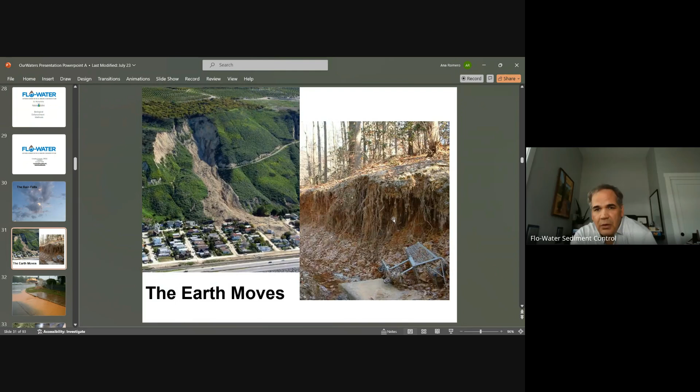The rain falls, the earth moves. There's a lot of steps in between that. And I look at each one of these ports, storm drain inlets, as the ideal spot for nutrients to go in. They're like, hey, I can go underground and go to the water. For trash, for contaminants, for junk, for debris. But I also look at it as the perfect place to control that stuff at the source when you're looking at it from a municipal or industrial point of view. Stop it from getting in that underground infrastructure.

Eliminate the spending happening now on repair, cleanouts, clogging, plus the remediation you have to do downstream, and it gets more expensive the further down you go. And spend the money now so you eliminate the problem and get it to the point where that's not happening and you don't have to spend a lot more coming here. And we have solutions for that. So again, from source to sea, let's take care of the problem.

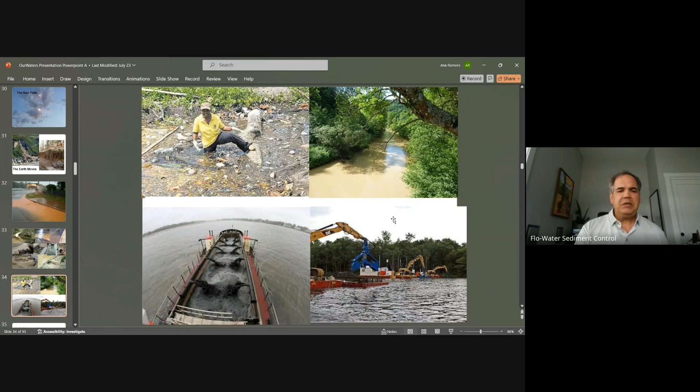A big push on basins has been part of the solution, which is great. But the issue is you have to have maintenance plans in anything where you're going to be filtering water, containing water, accepting water, and so on.

Sorry, I was admitting one more person.

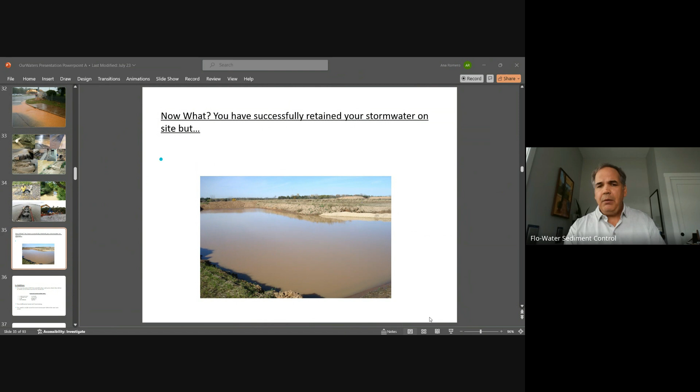And so a lot of those sit there, get overfilled, and it becomes a teacup overflowing, just like on ag fields where you're adding phosphates, nitrates, herbicides, pesticides into the field, and the cup keeps overflowing. But I'm getting off track there. Different sediment takes longer times to settle. So bioswales, rain gardens, etc., do deal with a large chunk of it. But when you're talking the fines, where the nitrates and phosphates are riding and the carbons and hydrocarbons, we need more aggressive solutions. That's where you're getting into the colloidal size. It takes 755 days to resettle each time it gets disturbed. It's just a process.

Sediment and erosion control are both key pieces in water quality. And that's why lately we've been getting projects, and I get these maps of 2 lakes in a huge development and the water report on it where there's alkalinity issues, there's nitrates, phosphates, other contaminants that we need to remediate. And I'm sitting there thinking, I can clean that up, done, but it's all going to come in again. So my mind keeps stepping back and stepping back.

And the experience I have in that soft armor reinforcing industry, where you deal with like Scour Stop or Pyramat or Landlok 300 or some of the turf reinforcement mats that stabilize ground with the root structure, environmentally friendly, biological solutions. That's awesome because you're keeping the soil in place upstream. You're developing vegetation that gets stronger and reinforced, so you have that ability to keep capturing nutrients along that pathway via biofiltration and such.

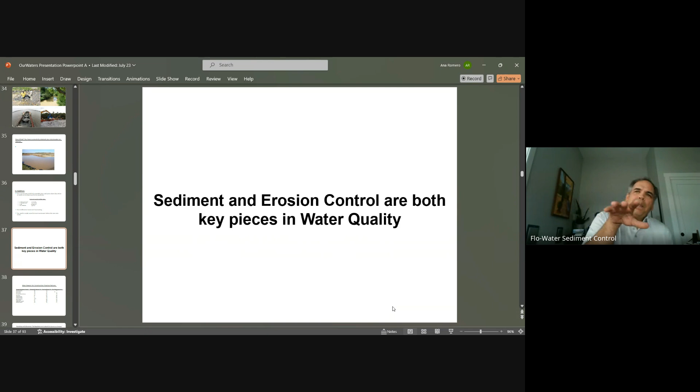The cool thing about that is now let's start at a time, 5 miles out. Let's pick the spots where we can start there and work our way in and control what's coming off the fields and the ditches and everything else, but also what's going in the inlets and stuff that are going to these lakes. Heck, Iowa just got a report that their 10 biggest lakes in central Iowa have capacity issues because they're half filled. Well, they're half filled because everything's coming in from miles out.

So let's remediate, let's deal with that stuff in the lake, which we can do and we will, but let's solve the issue long term so we have sustainable solutions. And that's what's really cool about what we're doing here. We have our waters and we have our soil, and together we're going to be approaching that from soft armor, water quality control, and the nutrient management solutions that are out there and needed.

Sorry, I keep having to add people.

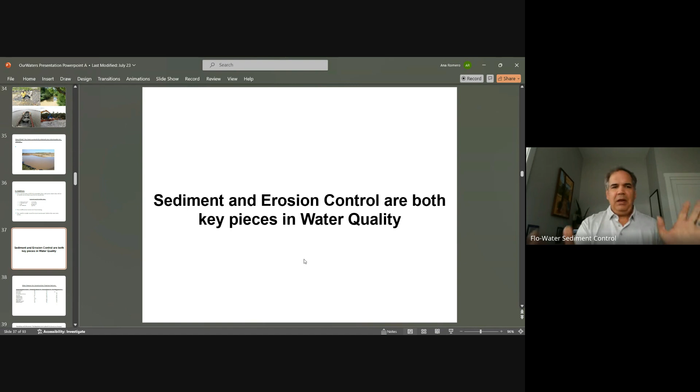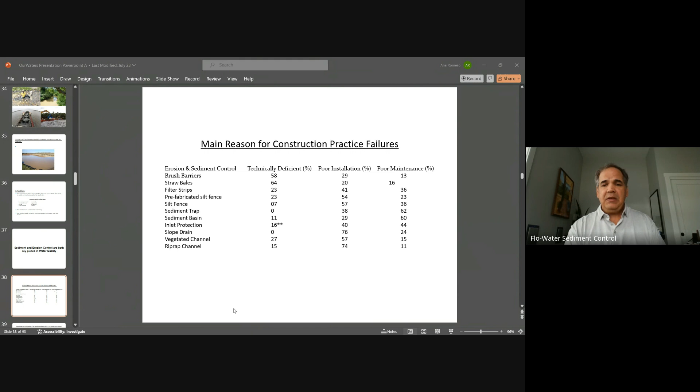The main reasons for construction practice failures have been pretty widespread, but the main premise on those is they're technically deficient. Sediment traps aren't. Sediment basins have a little higher success rate. Silt fence to a point. Inlet protection on the old standards. But innovation has taken it to another level, and I'm going to show you where the best of the best is here when you look at reusability, when you look at cleaning out, when you look at nutrient management, the ability to combine different media to deal with the issues that are in play. And that's where it gets really cool as we explore the options there.

Regulations have changed. Recently, they had another one released talking about the Indian reservations and the oil practices and pipeline and new regulations on more stringent stuff. But everybody's seeing the value of water and how we have to protect it. Soil in the water, sediment. It's dirty. It carries things with it like phosphates, phosphorus, etc. The list goes on. But it's the primary non-point source pollutant and the primary factor in deterioration for the surface water quality. It causes clogged stream channels, increased bank erosion, meandering, and flooding. We get that. What it's doing to our environment and the aquatic habitat is just sickening.

Funding's there. And you get into our solutions, and I'm going to fly through some of these, but our Pump-It Tube dewatering bags are flowing 2.5 times faster than the general big black bags that are out there. We're not grabbing that water and letting it sit there while it slowly seeps out and hope the stuff sits. We're getting 91.6% sediment capture rate. So as that water's releasing and you're grabbing what's in it, it's going to fill 30% on its own. But now you can run manifolds and run 4 or 5 bags at once. Turn one off while the rest keep running. You've eliminated downtime. You're filling those bags 70, 80% now, and you can stack them for shoreline reinforcement or repurposing back into the circularity, depending on the contaminant.

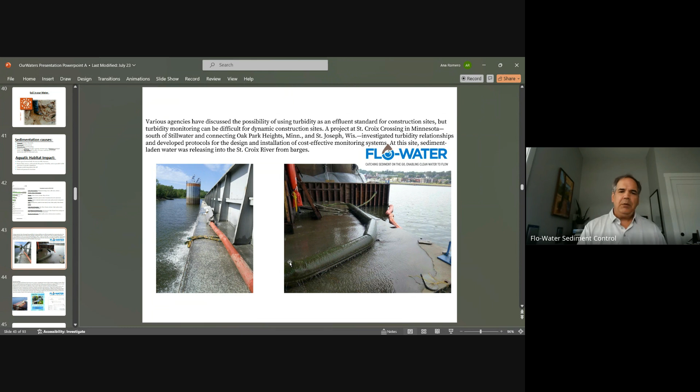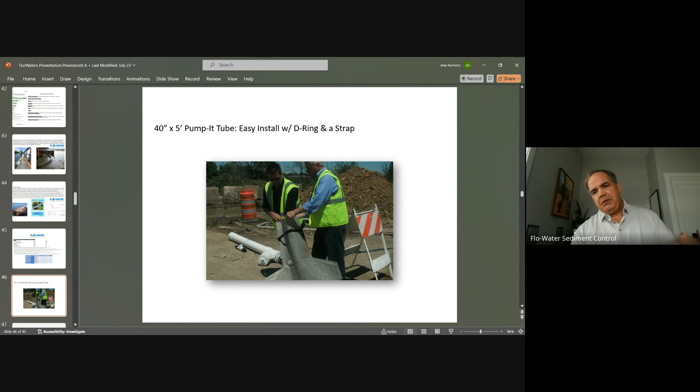We have all the stuff you need. It's approved everywhere I've approached. Hooks with a D-ring and a strap, so it's easier. You don't have to chain it, rope it. Elevate it, you get faster flows. They just work better. I have videos. I don't have time for that, and I'm sorry, but it's all on my website, aplenty.

They've done testing on it at different places. How can it work that way against the standards that have been out there? And the general consensus is if treating the same volume of contaminated discharge water with similar sediment concentrations and characteristics, the woven bags, which are the Pump-It Tubes, are capable of maintaining a higher flow rate for a longer period of use compared to the non-woven.

Our woven fabric has a built-in poly scrim like a hairnet, which gives it the structural stability to take advantage of the high filtering while giving it the structural strength it needs to enable it from performing and not breaking.

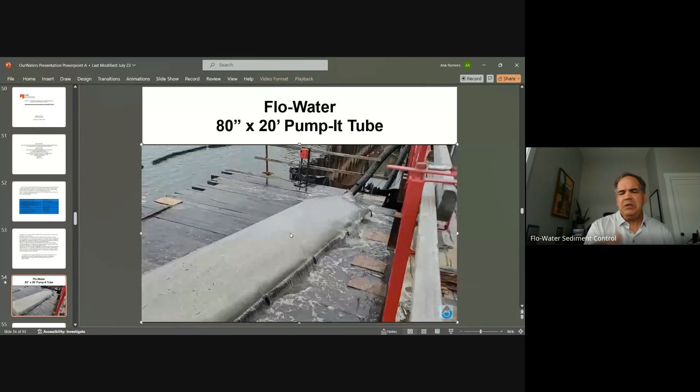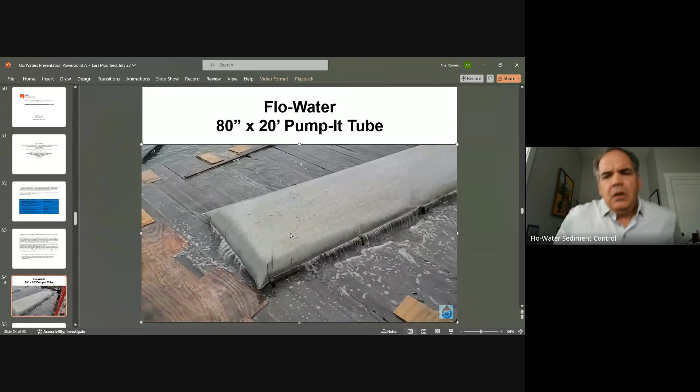This is over on the East Coast on that platform that's designed for the other size bags. That pump's running all the time straight into the bay, and you can see now split it, run 4 or 5 bags, enable that to run without shutting down on the same footprint that they were using 1 bag at a time on. And that's our 80-inch by 20-foot bag running on that pump full, which is good. You saw the video?

Good. The sizes here, 20-inch by 5 foot would handle a 2 or a 3-inch pump instead of 6 foot by 6 foot or 10 foot by 10 foot. Our 20-inch by 10 foot or 20-inch by 20 foot would handle up to a 4-inch pump running full instead of 10 foot by 15 foot.

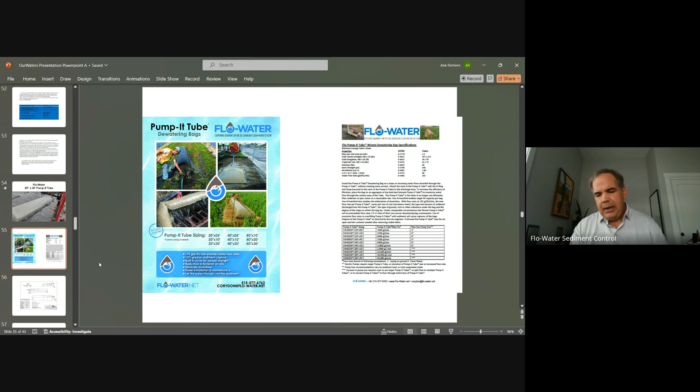Our 40-inch by 10 foot or 20 foot will handle up to 6-inch pumps running full instead of 20 foot by 30 foot. So you can see the difference on site, in warehouse, in transportation. The positives are endless. I've got it showing comparisons. It's all on my website. Any questions on the Pump-It tubes?

You are still there, correct?

Yes. Awesome. Now I'm going to talk about inlet protection. And this is where I get really excited because I just got my 3rd patent approved on what's the best of the best now. And when you look at what's been done over the last 30, 40 years, there's been a lot of really cool progress, but with the same restrictions in place.

If it's sticking above, you're going to have issues, whether it's maintenance not being done and it falling in, whether it's them poking holes in it because it's too difficult. And with the safety standards, we see why. Or designing something really, really performing well, rebuilding that inlet in essence, like on the middle left.

And that Flex Storm Prime or Pure or whatever they're calling it now is really a cool product, but it costs too much and nobody would. So they lessened the product and came out with the Flex Storm Lite, which is the upper left one, which has its limitations, but it's still being sold on that spec. So again, a lot of cool things happening in this industry, whether you look at it one way or another.

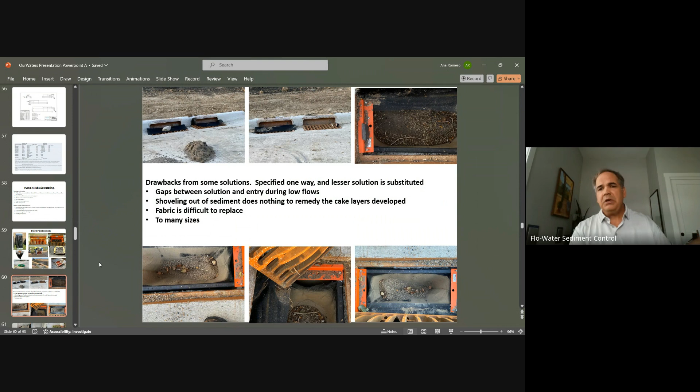This is the one I was discussing that has the gap between the coverage and the inlet, so low flows aren't being taken care of. They're using shovels to clean this out, leaving that cake layer in the bottom so it's a teacup overflowing down and in, and again, down to the underground infrastructure or rivers down below. If you leave it in and don't take it out, because contractors aren't paid for removal, so they're not going to go do it voluntarily, it becomes flooding issues.

That brings me to two changes that I think need to happen in the engineering industry. Anything with filtration on it has to have maintenance built in the spec, and when to do maintenance, not performance level to meet. Okay, if you have maintenance and you have to do it when it's 30% full, that cheap stuff that's a Band-Aid is going to have to be replaced every rain event. It's not going to work.

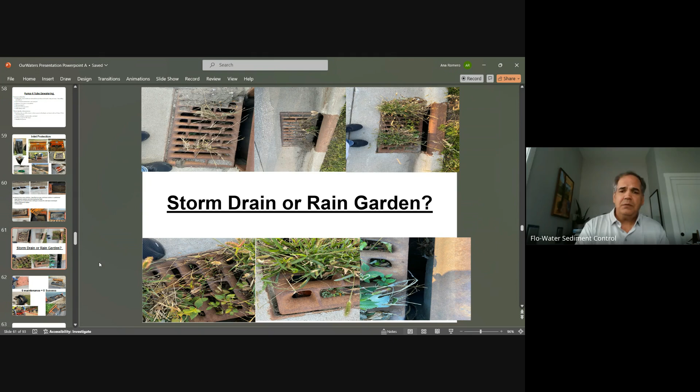That stuff that's meant to be there long-term will sustain. And that's a non-proprietary way of solving all those issues. Maintenance, maintenance, maintenance. If you don't do maintenance, you're going to have issues.

Our open throat curb, where there's no metal, just a space, we have metal S-clips on the sides and in the middle if they're longer. And they have negative friction in, and the fabric replaces after 18, 20 cleanouts. You can backwash it for more, you know. That's cool. And they can butt up end to end to handle larger openings, so you do have easier maintenance on it.

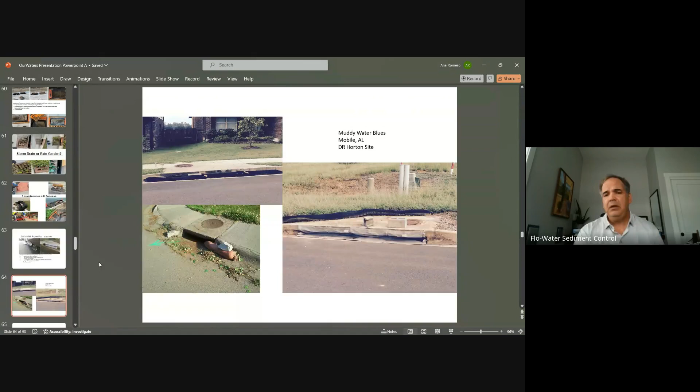Muddy Water Blues, D.R. Horton site in Alabama. What they had there had its issues, and it's pretty visual as to what they were. And then they had ours on the side, on the bottom right, which was recessed in, not taking up footprint. Pretty neat.

Then we have our undergrade EZ-Catch that adjusts both ways. So in most areas, two sizes will handle 90% of your storm grates that are square or rectangle. The bags Velcro off, so after 10 to 12 cleanouts if you're kicking it free, 18 if you're backwashing it, or so. Completely recessed under the grate. That curb is a magnet on top and tucks in. To me, that's the greatest thing.

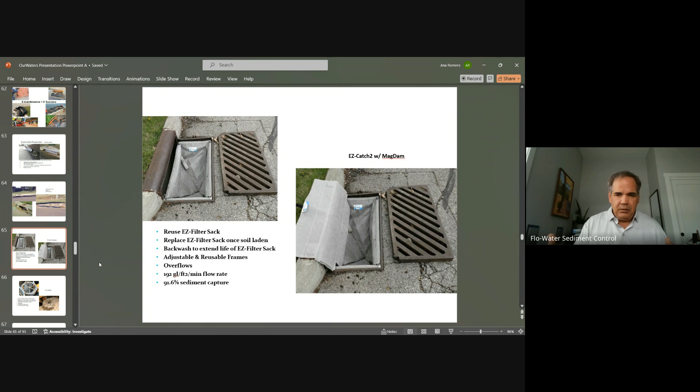But when you have people going out there and shoving shovels down and everything else, and the frame's not meant to rebuild it, it's meant to be stabilized by the grate. So we came out with something more durable I'm going to show you. Our EZ-Catch Man's perfect for round and manholes, beehive, etc. They adjust. The two sizes handle from 15-inch to 37-inch in diameter. Overflows in the corners on the other one and between the tines here.

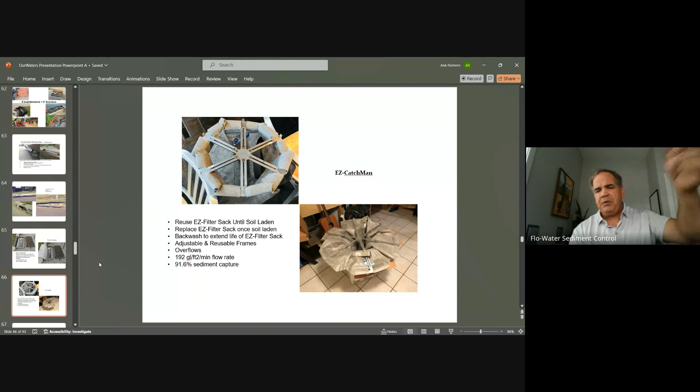So you get that faster flow rate, higher sediment capture, ease of maintenance, reinforced seatbelt straps in all of them to pull up with J-hooks so you lessen the strain. They're patented. We have specs on it. Makes it easy to tell people what you want on your sites. Questions on those two?

Well, and now when you look at it, and we have him coming up in two speakers, but like Aquaflex's carbon capture technology, you drop in those bags and you just made them carbon capture with repeatable, replaceable units in that. Our magnet on top, which I'm getting to, we have that now, a version built in where it's grabbing the nutrients when it comes through as well. So some cool advancements on that.

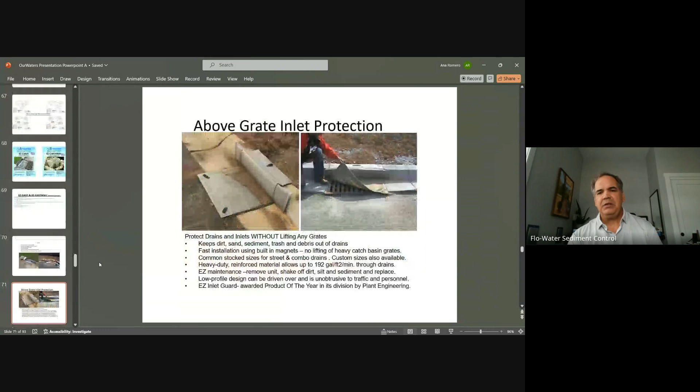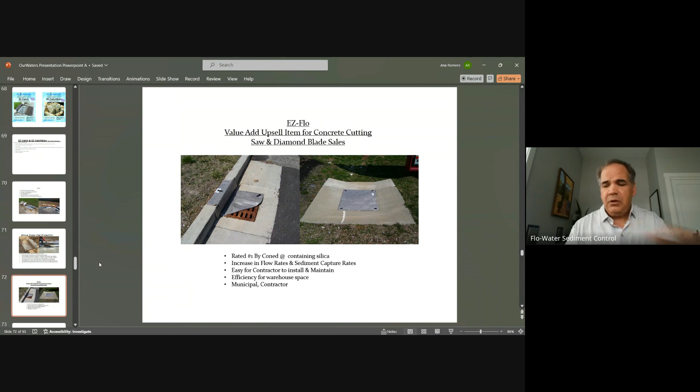Speaking of that, our EZ-Flo is our magnet on top. You don't have to tie it down. You don't have to move the grate. It hits a lot of safety concerns. Rated #1 by Con Ed in New York at keeping the silica out when they're cutting concrete, which is a federal requirement. So put it down, clean up, clean it out, next side down, boom. Cities will use it for 9 months a year before they have to replace it as they're cutting concrete.

This facility here had 35 of these inlets. Took us an hour to do them, less than an hour. All the other solutions, you'd be talking a day and a half or so. The labor savings is insane. Not to mention how much room in the warehouse you're creating by taking up less room in that spot. Flat, curb, overflow, curb with overflow.

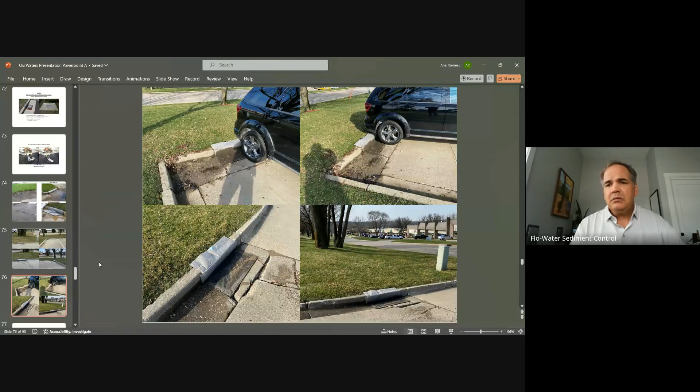Urbandale, Iowa. 3 big rain events, 11 days. That's what we kept from going down and in. Better curb appeal, patented.

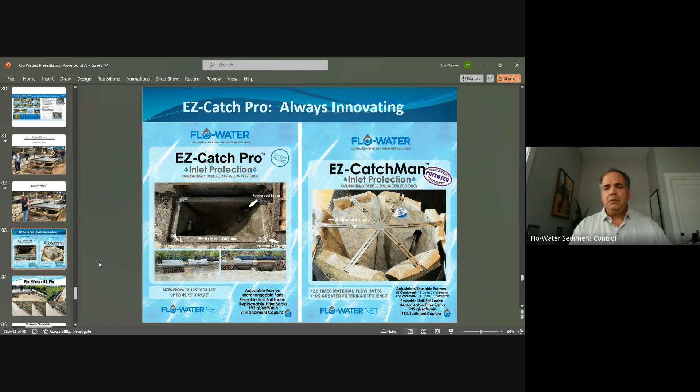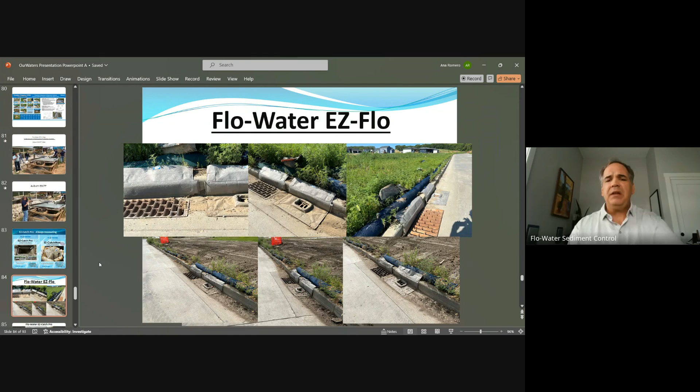This is West Des Moines, Iowa, on one of their busier street corners. Day after they took the concrete washout unit out and we're washing them all off, that's the silica we captured, putting it in, and then they did that in the upper pictures. Pretty neat.

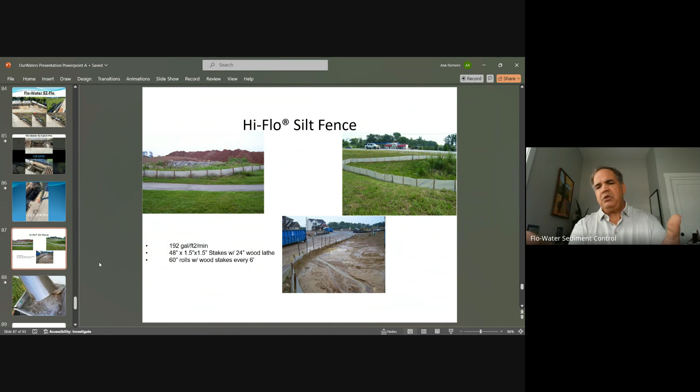Combining materials here, and you've seen us do that in a few spots, and we're going to get real creative in the next presentations, but our concrete washout system where you're having a pH stabilizer or pumping in CO2 if you get large enough. You have a flocculant, chitosan, along with a bridger flocculant, which is a chitosan poly mix. And you're able to filter that concrete slurry on site instantly, water treated, and just be left with the hard residue instead of letting it sit there and do what it does.

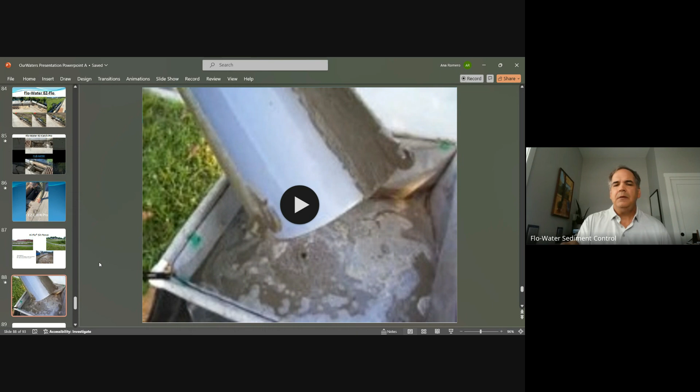And we've seen it. Large project up north, Big Lakes, Island project, 30-yard dumpster, double wrapped with our fabric, pumping in CO2 to deal with the pH level, pumping in the flocculants as it's going, and they could dump it all in, filter it on site in the false bottom dumpster, you get what I mean? And then that hard residue they have left over, they're able to put in for helping to rebuild the coral reef underneath. So there's some cool applications being had, and that's where this starts.

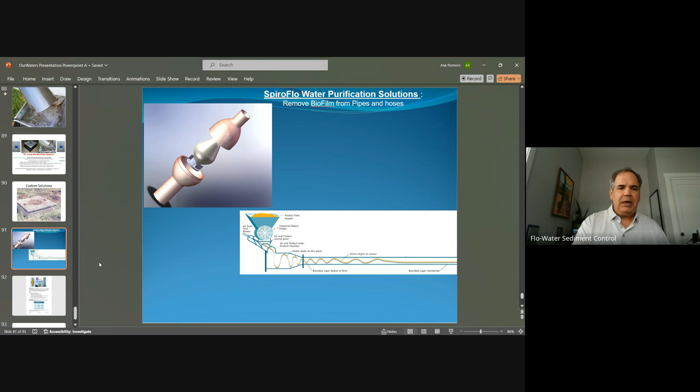Other really incredible technologies we have started promoting just because they make sense is like SpiroFlo. Whether it's grain running or whether it's water in municipal facilities, waterworks, any pipe this is put into, it creates a tornado effect, as you see in the drawing below, where it eliminates that slime layer on the piping, tubing, etc., so you don't have the repair and maintenance as much. The water consumption is reduced drastically. Just a lot of really cool positives that we're getting into more and more with that. Again, go to our website on this.

Before I hand it off next to Jamie on the Reimar stuff, I'm just going to touch base on BioStar, because George is on the other side of the country now doing some work, which is great. But this is a flocculant made out of crab shells, shrimp shells, exoskeletons of sea life. It's put through a deacetylation process. So it becomes water soluble, or they can make a flake formula that you can meter release. But it turns back to water and CO2 when it's done.

So quickly it takes those dirts and flocks them together so they can be filtered. And then there's no residue left over like some of the other flocculants can leave. And again, everything has their place and we represent them both. But that's where this got started in the mining industries and other things, lake projects, stormwater applications. I've been working with them for 20 years.

But their next evolution, which to me is really cool, is their dust control. They've developed a 3-level system on dust control, which has no chlorides in it. You've just eliminated one of the biggest contributors to an environmental issue when you're talking water and even soil when you're saying chloride. So that's pretty huge. And again, we have a tote available, dry formula, meter inject, and on the dust control, it comes in liquid totes if you want it pre-mixed, or you can get it in the dry bags and mix it, which is a lot more friendly freight-wise.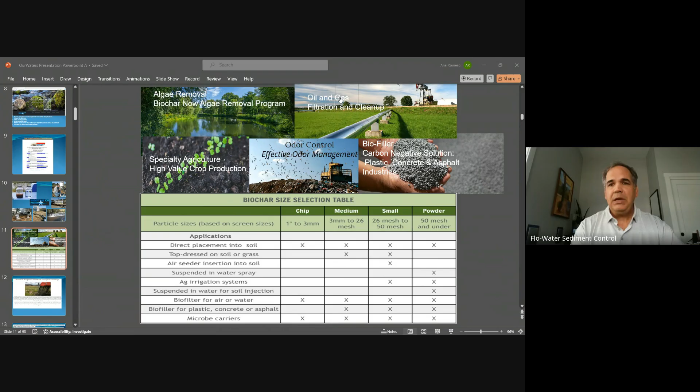But I'm teasing you. My 30 minutes is up, so I am going to take questions. Does anybody have any questions for me now? Scott, Steve, Jamie, Jeff, Rome, Abigail, Itunoa. Questions?

I don't have a specific question, just a comment that this is the kind of collaboration that's necessary with all of the problems going on with water. And it's great to see a whole suite of technologies joining forces, which is few and far between until what you've put together, Corey. So thank you.

Well, I appreciate that. And I was having a really cool discussion yesterday with someone that I respect and everyone would respect if I had the freedom to tell you who it was. But the eye-opening they had was, well, not only are you having a suite of solutions where you can solve the problems, but when a city, a contractor, an engineer, a municipality, a governing authority comes in, they're not just seeing one solution tied to one manufacturing facility. They're seeing a suite of options themselves so they can make the right choice.

And so if we have someone bring us a soil contamination, like downtown Des Moines, they have a 4-acre property that's 8 foot deep, contaminated soils, 3.7 million plus to take it to the landfill, hazmat fees, remove 8 feet of dirt, bring 8 feet of good dirt in, boom. Carbon footprint, insane. We get it. Landfill's already full. Where are they going to put it?

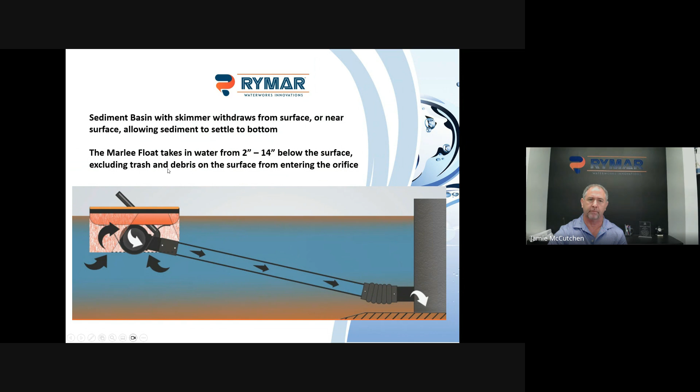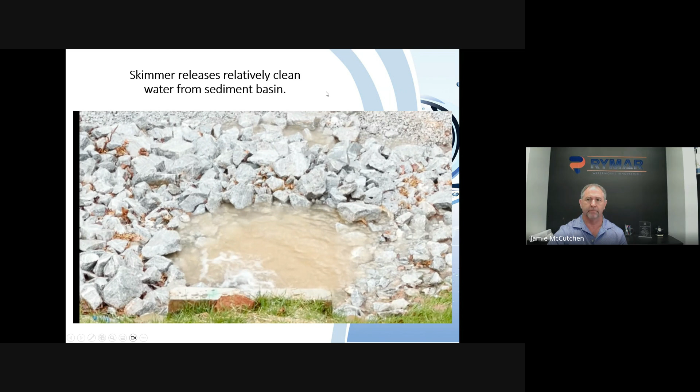So if anyone's not familiar, skimmers are typically used in sediment basins. They meet a surface withdrawal requirement. So they drain the basin from the top down, allow more time for mud to settle and release the cleaner water from the surface. This is a quick video of one of our skimmers on a project that's directly adjoining the lake and a pretty nasty sediment basin. They actually had a big blowout on the side, but that's the actual outlet. Compare the water that's in the basin to what's being released, and this is draining directly to Lake Hartwell, probably less than 100 yards away. This shows how effective they can be, a simple product, but very effective in releasing the cleaner water.

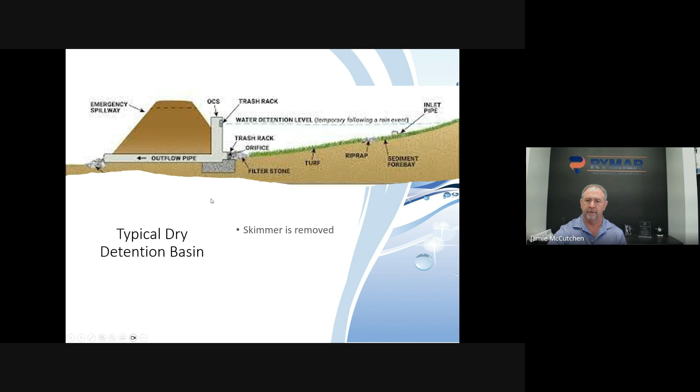People generally think of skimmers as during-construction products, and they remove them post-construction. So in a typical dry detention basin, once construction is completed, they remove the skimmer. They put some sort of a low flow outlet near the bottom of the pond and size it to release a first flush. First flush methodology is generally intended to allow for pollutants to settle, but we're settling everything to the bottom of the pond, and then we're pulling the discharge from the bottom of the pond. And they typically have some sort of outlet structure, filter or guard to try to minimize clogging. But these need a lot of maintenance, and there are some fallacies in this design.

So we've been pushing to use skimmers in the basins. Again, basins rely upon the natural settling of sediment particles. They travel from the inlet to the outlet, so over that flow path, you're going to see the sediment particles generally make their way to the bottom. And so skimmers release that cleaner water from the surface, and they've been widely accepted for construction, proven to be a very cost-effective item to do that.

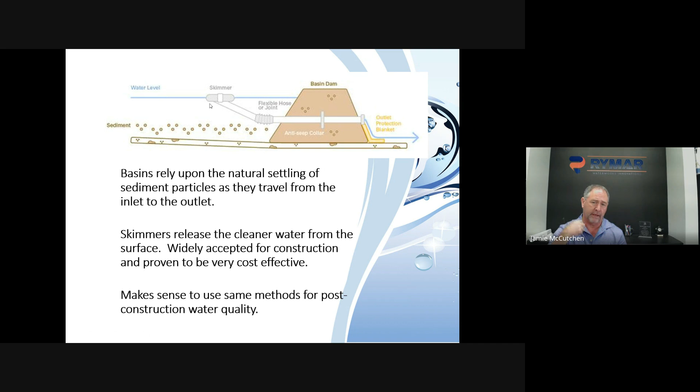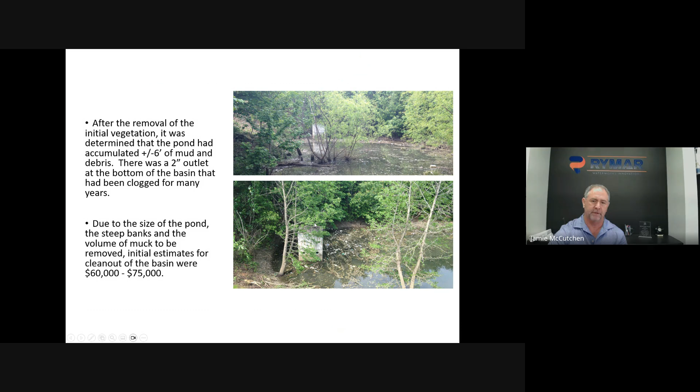Once the vegetation was removed and kind of timber harvested out of it, we realized there were 6 feet of mud built up because there was a 2-inch outlet at the bottom of this basin that had clogged many, many years ago. And it just continually built up debris and muck over probably 15 or 20 years. The estimate to clean out this pond was probably $60,000 to $75,000. Be a lot more than that today.

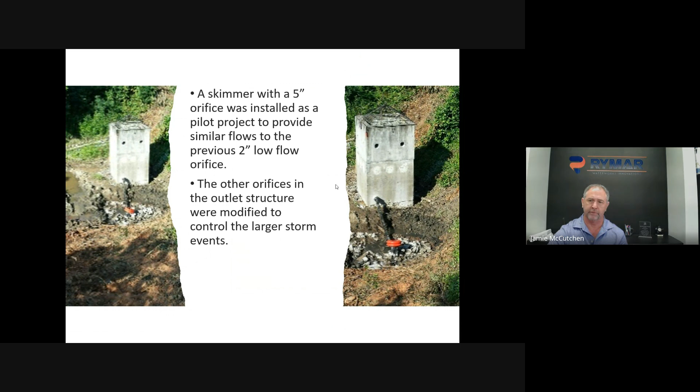So we ended up redesigning the pond. We put in a skimmer as the primary low flow orifice, and then changed the orifice configuration in the pond. The advantage here is we had a 5-inch skimmer, so it was much less prone to clog than a 2-inch low flow orifice, but it had a similar flow control. And we monitored that pond because this was a pilot project in this county. They required us to do monthly monitoring reports to make sure it was working correctly, which it did. It worked very well.

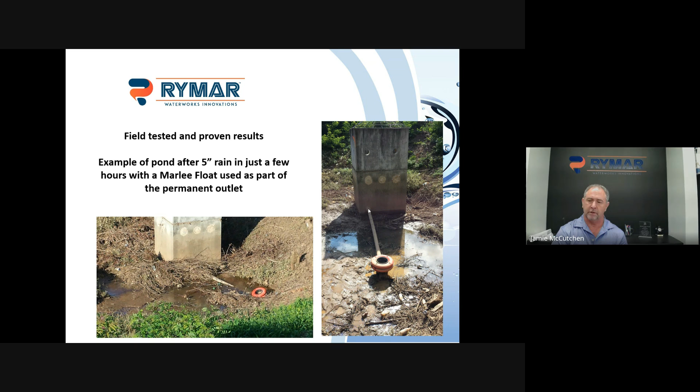It's kind of hard to tell from this picture, but that riser structure is about 12 feet tall. And so if you had a 2-inch outlet down here at the bottom and that had clogged, it would have been an extremely difficult, probably dangerous situation to try to unclog it. So we've been pushing skimmers. Really, we came out with this one in 2013. We've been recommending them for permanent use, mainly for maintenance. These detention ponds often aren't maintained well, and those low flow outlets get clogged. And so if you can do anything to help minimize the maintenance, that's definitely a good thing.

But just now we have developed our water quality filter. And so this is that same pond. We've kind of used it as our sandbox or playground for the last 10 years. And we came up with an idea to say, hey, what if we use the skimmer to pull water through some sort of a filter and provide even more treatment before that water gets discharged?

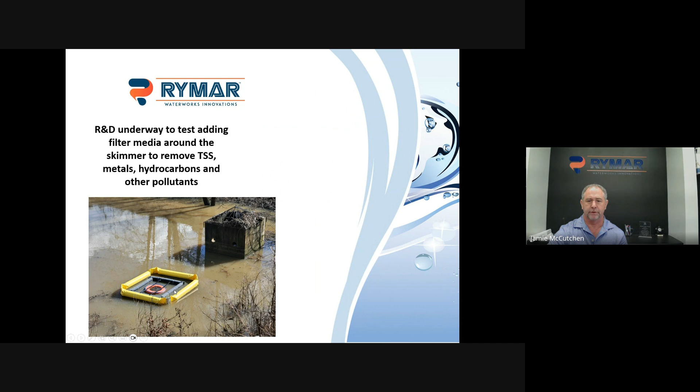What we came up with was a 2-stage system. So the outer stage, and this was our prototype, was essentially a turbidity curtain, but it had a filter material built into it so flow could go through it. And then the inner was a non-woven material that's designed to absorb hydrocarbons, definitely helps with TSS, and can also potentially help with metals. We monitored this thing for about 2 years.

And you can kind of see the turbidity here in this left picture. The water in the main basin is darker, more turbid than the water as it gets to the skimmer. If you look at the outlet structure, I wouldn't drink it, but it's fairly clean water for coming out of a detention pond. So we felt like it was doing a pretty good job and meeting what we were trying to accomplish. So we had TRI Environmental do testing on it.

It was done to an ASTM standard and determined that we met over 90% TSS removal. So in most places, water quality standards are either 80% or 85% TSS. That is a pretty typical standard. So we have confirmed our skimmer filter combination meets that, actually exceeds it at over 90%.

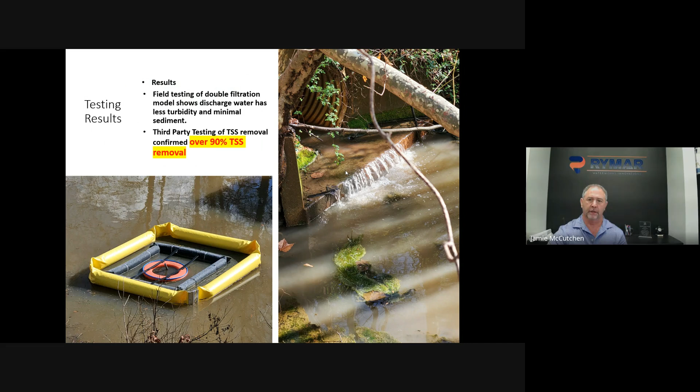One thing to point out about our testing was we set the test tank up so that it did not have a forebay, had very little travel distance. We're actually putting the sediment-laden soil into the tank within about 1.5 feet of the filter. So we took out travel distance, took out forebay, and just said, hey, we want to see kind of a worst case condition for just the filter itself. Still got over 90%.

Jamie, quick question for you, and I may be getting ahead of myself, but when I look at that, and I've always seen post-construction, whether it be large scale at the casinos with their big ponds and fountains and everything else, or in developments that have lakes and stuff.

Do you see this at the forefront, having a rising filter and those controlled things where the water can be released and used for irrigation and other purposes from that point? Yeah, I think we've got a ton of potential. Obviously from the stormwater standpoint, what's regulated, what's required, is kind of where the market starts to meet. And so we feel like the cleaner water you can get, the more you can trap in the basin, which is kind of the main purpose of the basin, to trap those pollutants there so they can be managed and handled. But yeah, you're releasing that water. It can be used for irrigation.

We had some discussions with Clemson University. They've got a program for developing countries. Like, hey, if you're pulling water out of a river, could you use some sort of filtration material like this to get cleaner water? It's definitely not going to meet U.S. drinking standards, but it can be a lot cleaner than what they have now.

Well, that's what's on our minds, at least my mind, and in our discussions. I don't want to let too much out of the bag, but the media we have, Scott's materials, my materials, combining these, I think these units will be able to be tailored to taking out what's needed so that water is the most usable again. And that's one of the huge points of what our waters and our soils is.

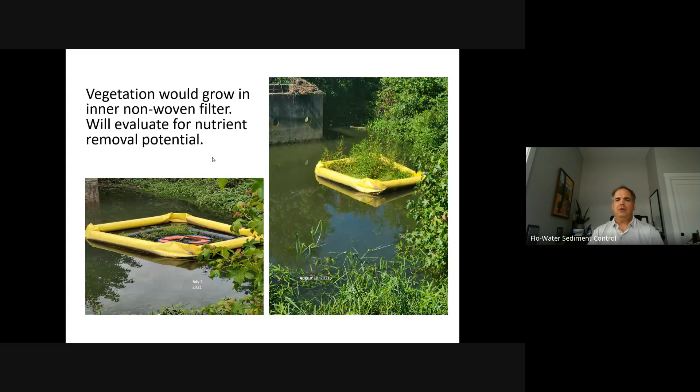Yeah, when we came up with this two-stage system, the idea was that we would be able to incorporate specialty media into the system very easily. Now, some of that media requires contact time to have more efficiency. The non-woven material we use is actually treated with an antimicrobial. So areas that are having bacteria issues or fecal issues, it will help some. Full disclosure, we have not done testing on that yet to see how much it helps, because it does require contact time.

But that interior filter is actually 2 layers, and it's slitted and the panels are offset. So basically it creates a weaving motion through the filter to create that contact time. It's still fairly quick. I don't know if it's going to be super effective, but any little thing we can do that can incorporate media that will tackle more than just sediment, we feel like that's going to be a benefit. We're not saying it's a one size fits all.

There's certainly partnering with other our waters groups and materials to go in there. That'll be kind of where hopefully this organization goes, to see how we put different products together. One interesting thing when it comes to nutrients, we had a time-lapse camera set up on this pond, and in the summer we actually started growing vegetation. So the non-woven material, over the summer, started sprouting.

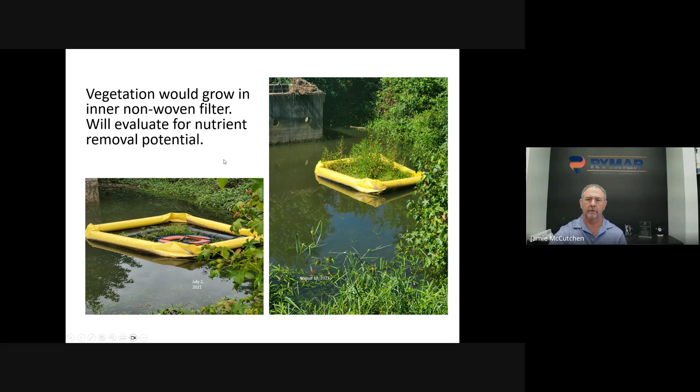We have now kind of finished our initial prototyping, finished our testing, and come up with a commercial version that's just now becoming available. We continue to monitor it. This is kind of a little bit better picture of this pond. One thing to point out is this pond is in a heavily commercial developed area, but most of the development does not have any other stormwater management. So it's maybe a 40-acre watershed or so that comes to this pond.

It's located on a former car dealership, so it's basically got asphalt all the way around it. And upstream is a grocery store, shopping center. There's an electrical substation there. There's several other retail developments. But you can see, and this is fall, so you've got a lot of leaf litter and other debris in there. But this pond gets a lot of muck, just a lot of stuff in it.

And so as we continue to monitor this and show that it works, it is a dry pond, so it'll drain down pretty much entirely, and then the next rainfall fills it back up. And so one of the benefits of our filter compared to traditional methods of water quality: when you get a small rain event or a slow rain event, and basically water's coming in and going out just about as fast, that water's still having to go through the filter to get to the skimmer to get discharged.

So you're treating those really small rain events. And then what we recommend, depending on the size of the site and size of the area, if you can size the skimmer to control that low storm event, in most cases that's like a 2-year storm, then you're now treating up to whatever event you can control with the skimmer.

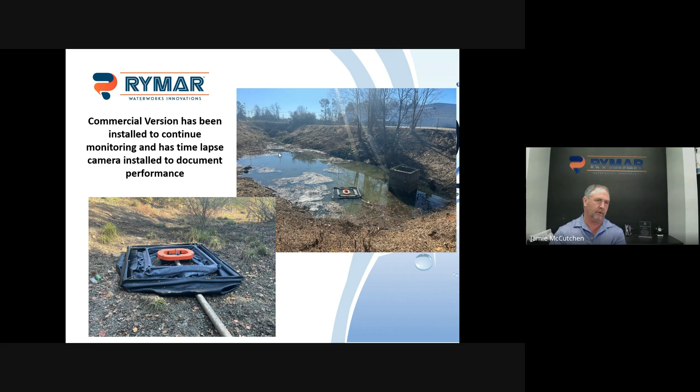So if you can size the skimmer to be your 2-year outlet control, you're now treating everything from the trickle all the way up to that 2-year storm, which is you're getting much more of that annual rainfall, and you're treating it to something that's been tested to show at least 90% TSS. And again, that was not counting a forebay, not counting travel distance, not counting any vegetation in the pond. That's also going to help. So we feel like you're going to easily achieve that 90% level in most cases.

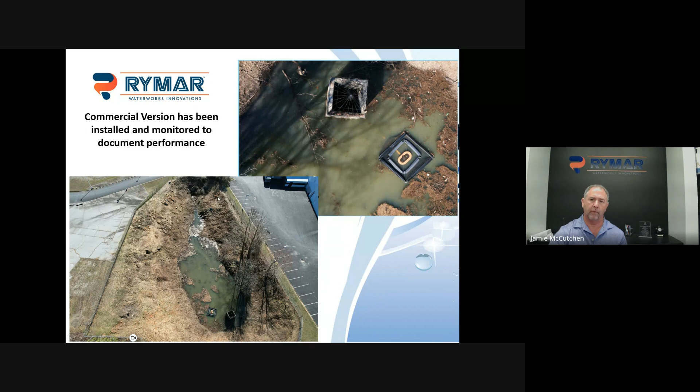Again, this is a little better picture of the pond. It's kind of a top-down view. You can see the skimmer in there with the filter, draining into there. And then this is just a bigger view of the pond. Again, asphalt's all the way around it. So the idea here is that the skimmer floats, you get a high filtration rate coming through the 2-stage system.

The filter is about 3 feet deep in the pond. So if the skimmer rises up more than 3 feet, it's open on the bottom, and so water can come underneath. At that point, we're allowing gravity to basically do the pollutant control because it's a very low flow rate coming below the skimmer up to it. And so it's not enough force there to pull those sediment particles or pollutant particles up to the skimmer to get discharged. So it's kind of a hybrid of filtration and gravity system that allows it to have a very long life, very good flow rates.

And again, you kind of see the 2-stage system here. We've got that outer, just a polyethylene, typical woven geotextile fabric. Corey, we're definitely going to look into using your fabric in there, because I think it would be an even better application for it. And then this interior is that non-woven material.

So just quickly, some of the benefits that we talked about is your peak rate of discharge for your pond can be based on your filter treatment flow rate up to that first quantity storm event. In most cases, you're basing that on that first flush release. So you actually release that first flush faster, which actually makes your pond smaller. So from a developer standpoint, if we can make that pond smaller, it's going to give them more square footage to develop, kind of better yield from the property. So it makes them more willing to add this type of material.

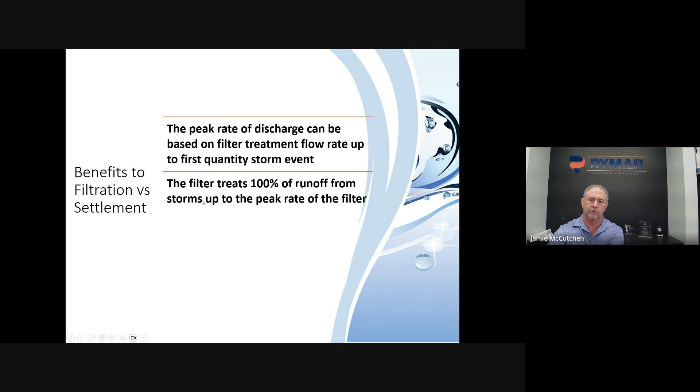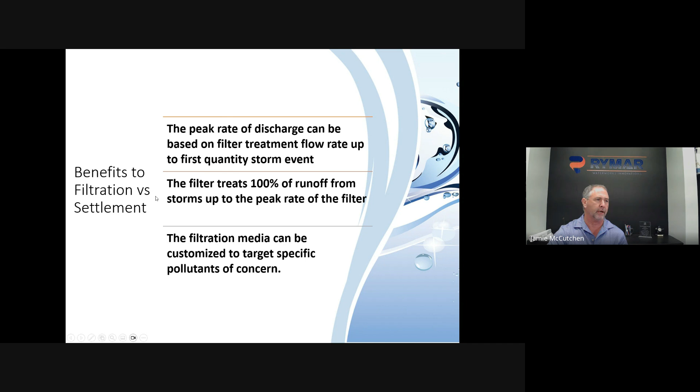Again, the filter is going to treat 100% of the runoff from storms up to the peak rate. And like we talked about, we can customize that filtration media. I think this is really where the Our Waters organization comes in and starts partnering and says, hey, we've got a material that can meet whatever pollutant of concern. We can incorporate that into our system and then come up with a system that attacks the specific concerns for sites and general areas that have different concerns.

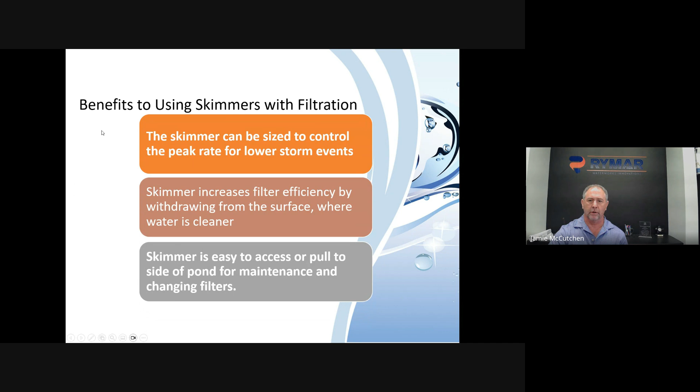There's obviously some benefits to using the filter with a skimmer. Again, the skimmer can control that peak flow rate. The skimmer is going to increase that filter efficiency because you're withdrawing from the surface where your water is cleaner, so you're not having to treat as dirty a water as it is on the bottom. And then the skimmer makes it easier to access. We're putting these filters in the pond, so there's a huge volume of pollutants it can retain, and you can get to it pretty easily to clean it and change it. And currently we're recommending every 2 years to change our filter.

It's not a perfect solution. It's not one size fits all for everything. Filters are prone to clog over time, and so you're going to have to do maintenance. Corey, you talked about it earlier, different areas enforce maintenance requirements differently, obviously, right? Some areas are really proactive and do a great job, require annual inspections and annual reporting and make sure they're done. Others, ponds may not be seen for 5 or 10 years, and that's just the reality of where this industry is right now, depending on the MS4 you're in. But if you're going to consider this, it's going to have to be maintained.

The other thing is the skimmer has to be durable. A lot of the skimmers out there are made of PVC. We wouldn't recommend a PVC product. Ours is an HDPE product. It's a 20-year plus lifespan. And the biggest challenge for us, and this is where organizations like Our Waters and others can kind of help lead the charge: there are no established standards for basis of design.

So one of our biggest hurdles right now is the engineer wants to use this. The local MS4 is like, well, I've never heard of that. Nobody's ever done that before. And so they don't have a method in their design manual that says, okay, here's what you have to do to get approved. A lot of times you can overcome that in a variety of ways, just an engineer explaining what they're doing, or we're trying to get the word out to MS4s. But it's definitely one of our challenges right now, people that want to use it having to make sure that the local authority will approve it.

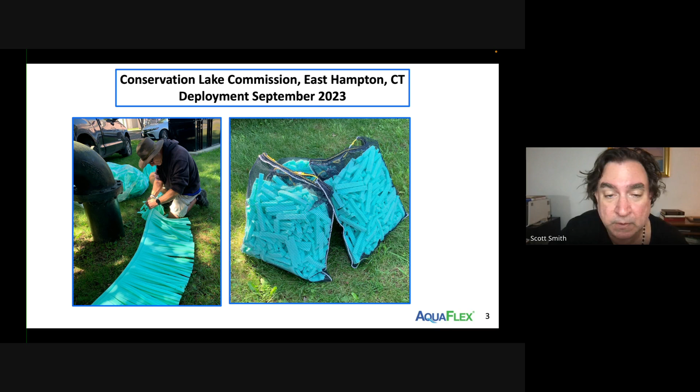And I've actually trademarked sustainability without compromise. What that means is low carbon footprint, minimal impact on the environment, and maximizing protection of health and clean water. So the point is, this is a low foam density. You're not using much carbon, and it's reusable. You can wring it out, and you can clip.

And we'll get to more in a bit about how it's not just for remediation. You can actually clip things off. It's part of my patent, and you can tell what you're absorbing over time. And you can see this installation here from last September. You can clip little segments off of the blades of the open cell foam eelgrass, and you can track what it's absorbing and pulling out of the water over time. Clip one blade off every day for 7 days, if you understand what I mean.

And you can see here it absorbing a variety of contaminants out of the water, and we have been able to pull the excess nutrients, especially particulate phosphorus, out. And I've got some short embedded videos. Here's a video of this install.

One question I have, Scott, is that's instant. The moment that hits it, it's captured. It doesn't have to sit there and cool, correct? Yeah, I mean, and it's over time too.

Can you hear this video too? Can everyone see the video? Yes, I can. But it's the background. I'm not hearing properly.

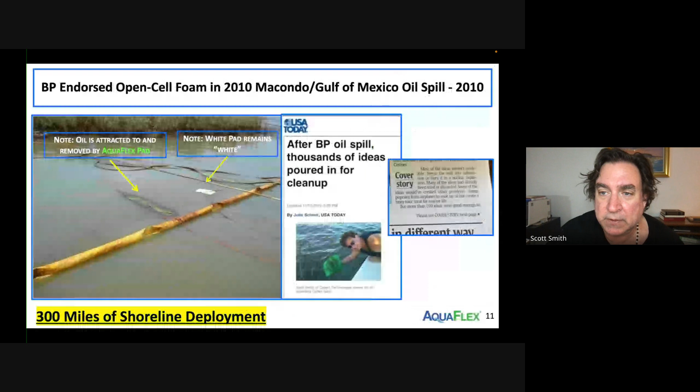And I have a saying that when your technology works really well and better than everything else out there, it's disruptive. And as entrepreneurs, you think everybody wants to buy it. And then you get threats and the big companies saying, well, we don't want to use your technology, Scott. We don't want to get the oil out of the water. We'll lose 80% of our revenue. We're associated with the landfills, the more trips we make to the landfills. But I think we now live in a world 10 years later where the old legacy technologies and business models preventing technologies like these from gaining traction, those days are over.

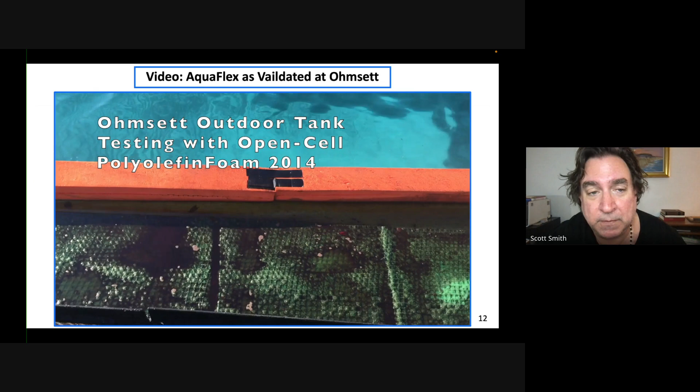And then I validated it in a real world oil spill first, and then the United States Bureau of Safety and Environmental Enforcement has an OHMSETT facility. Some of you may be familiar with it. And here you can see our material with wringing out and recovering it. So in many applications, you want to talk about sustainability without compromise. This is so effective.

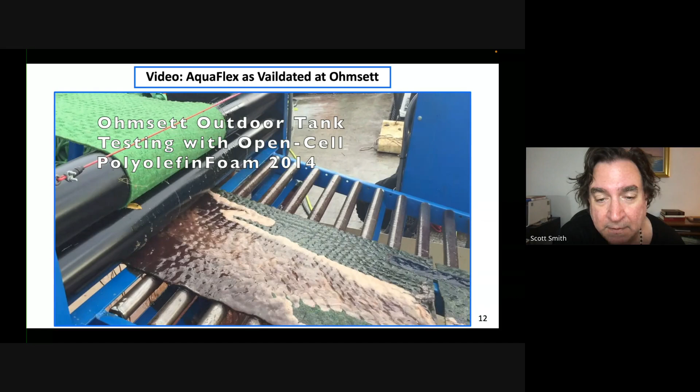That's my trademark, sustainability without compromise. The material's proven so effective that some billion-dollar companies spend a lot of lobbying dollars, and they want to keep filling the landfills. But we'll work through that, and that's the benefit of an alliance with Our Waters. And it's about the water column too. We've done a lot of testing where we can remove oil, excess nutrients, and all contaminants from the water column.

I want to show this short video, and then I'll explain it.

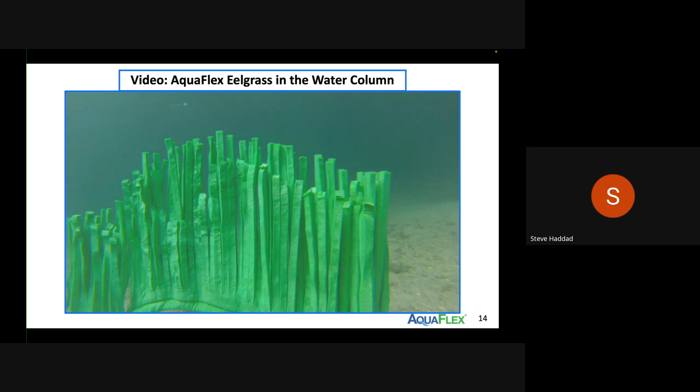Can't hear a thing, Scott. He's just watching the video now and he'll explain it after. Sorry. Okay.

So what that video just showed, before I get to the next one, is you hear in the healthcare industry about prevention being the cure, and what you see is divers in the water column clipping off the eelgrass blades, and we can figure out what is in the water and test for the full spectrum of contaminants.

A project that I'll be going out and working on with the University of Washington and some subject matter PhD experts is that eelgrass is dying in the San Juan Islands in Washington State, and they can't figure out why. So we've been doing some experiments and deploying in the water column to help figure out, is it a specific contaminant? Is it a combination of petroleum hydrocarbons from increased population? Is it excess nutrients? You get the drift, because they can't tell.

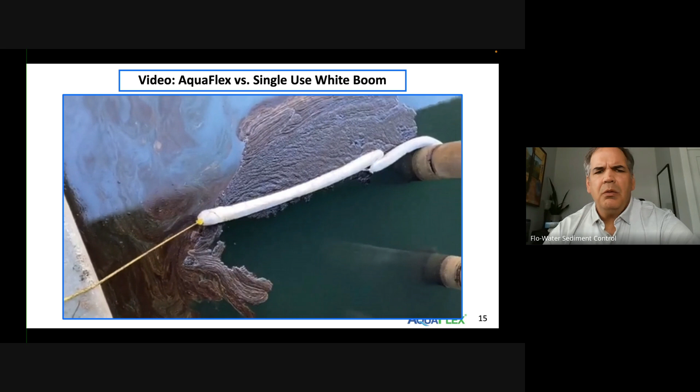We have a hard time hearing you with the video running. Okay. That's incredible.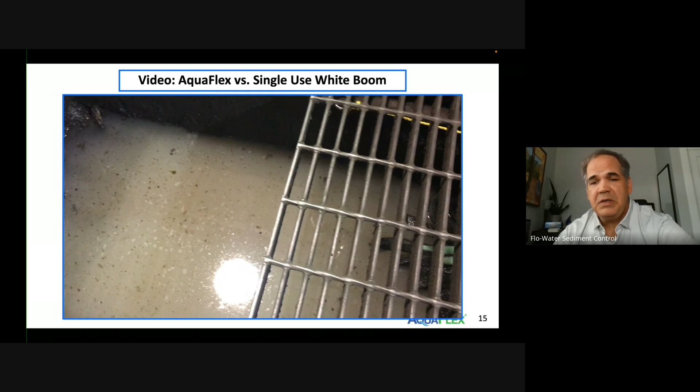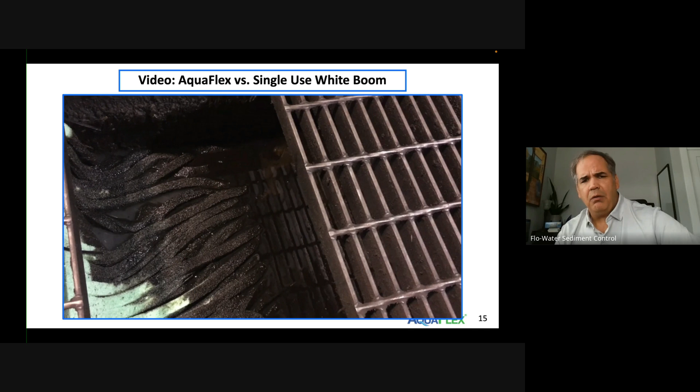And if you can hear me now, in conjunction with our Easy Catch Pros, those eel mop heads get dropped in the eelgrass, and you have removable units that are grabbing the nutrients in those facilities. Our magnet on top, we have developed with a ring around it where it detects when contaminants are starting to go in the inlets, and we're developing it so it actually contains them as well. So a lot of cool collaboration stuff just started happening.

So, the point is what you see there. It's almost absurd that those single-use white plastic booms are still being used and needlessly filling landfills in a day and age where some states want to ban single-use plastic straws. When you look at the amount of these white booms and pads that are not effective and that get thrown out every day. And again, Corey, this is why we need to come together, given the power of the lobbying from the legacy companies.

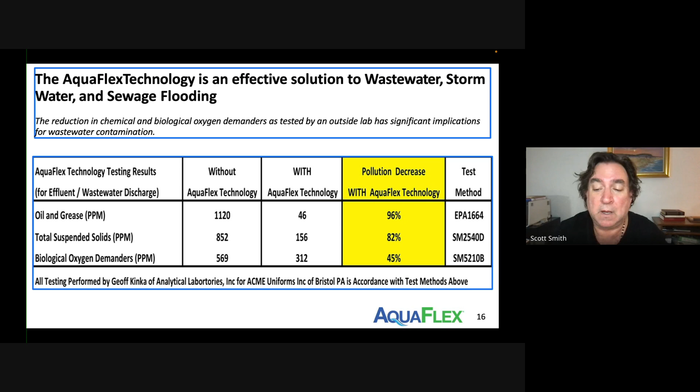I wanted to make this brief and take some time for questions, and everything we do, we validate with the technology. That's the beauty of the patent. So you can see these filter bags for wastewater, stormwater: 96% reduction in oil and grease, suspended solids, biological oxygen demand, all significant reductions. And this is with Aquaflex. With Aquaflex, TPH reduction of greater than 90%, and suspended solids greater than 50%.

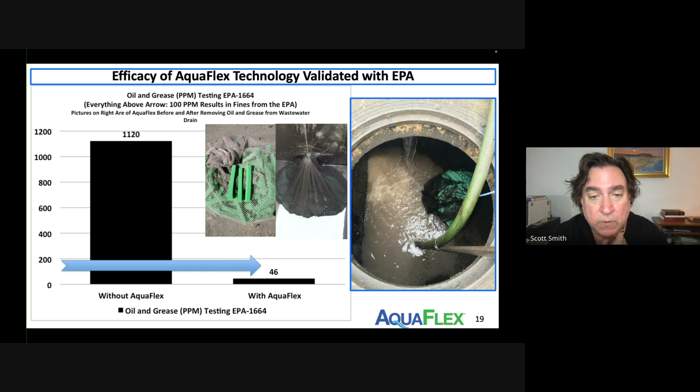And Corey, this is again what I'm excited about in working with your technologies: these filter bags, Aquaflex alone, already proven effective, but they're going to be that much more durable and that much more effective for a broader array of contaminants utilizing your technology and others.

Well, again, it's about incredible media and the delivery systems. Yeah, you take your Aquaflex and soak it in Naturasolve or soak it in Chitosan and then deploy it out there. And now you're releasing media while you're capturing nutrients and treating it in those aqua hubs. I mean, that's exactly where we're headed, and we've had success in some research and development.

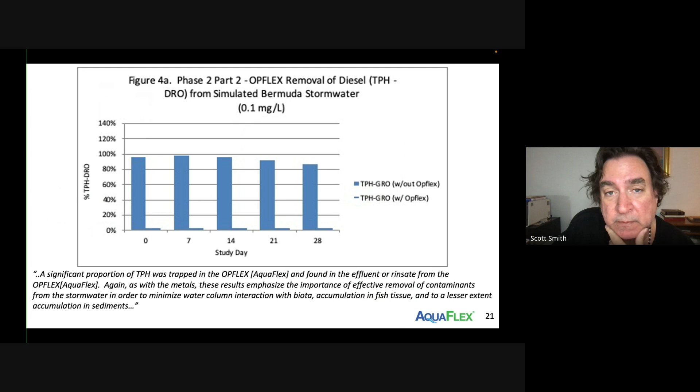And this is basically an appendix of some of the work. Believe it or not, I never knew that it's considered that we'd work so effectively with particulates like phosphorus and certain metals, and this is more of an appendix. I'm not going to get into this, but Corey, you can distribute this or post on LinkedIn. This is for anybody. Consider all these slides like an appendix that kind of shows prior work.

Here is on Nantucket where we proved out the phosphorus removal going back to 2014. And this again shows taking those eelgrass blades over time. And this is the uptake within the foam over a period. So you got all the tourists arriving, all the human activity, and it shows how it's concentrating more and more of the particulate phosphorus over time.

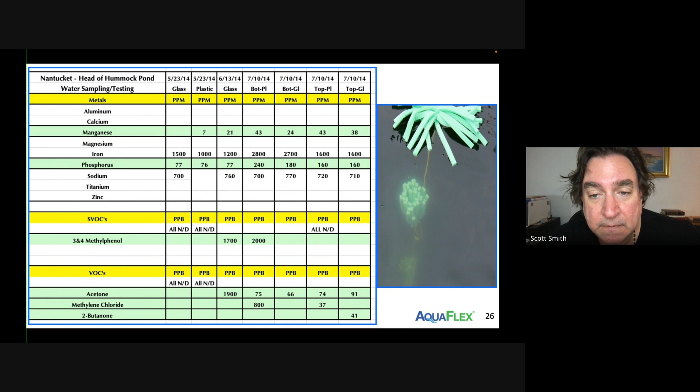And these are some of the other chemicals we can absorb. Again, consider this an appendix for those that are interested that want to go deeper and see more of the data. Well, and you'd mix that with biochar and you've grabbed phosphorus and nitrates. Yeah. You just eliminated what's making the algae, and I'll touch on that at the end about how right now with our collaboration, we have 3 ways of dealing with lake algae. And I'll touch on that later.

Correct, Corey. And part of these solutions is understanding what each technology does really well. Because if anybody tells you one technology does everything, they're simply full of some BS. Because when it comes to dissolved contaminants or nitrogen, we're going to have to add something to the foam, and dissolved phosphorus. I mean, that's why combining the biochar and other things is really good.

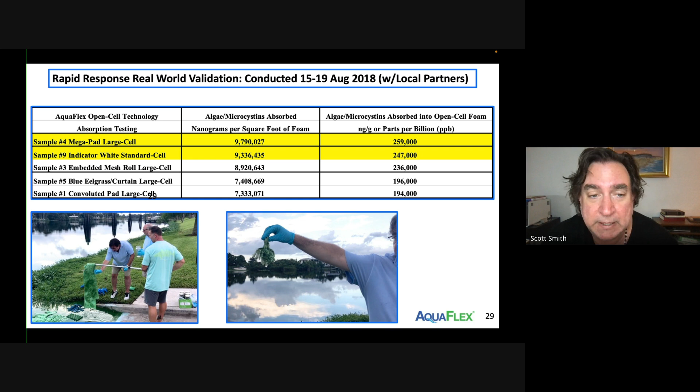And then here's some Florida harmful algal blooms. And again, hopefully we get to the point where we can minimize these harmful algal blooms, and we're not using any of these products. And we want to solve the problem if we get the excess nutrients out of the water. So that is basically the end of that. So any questions?

Yes. Yeah. Somebody raised a hand. Good. It's Nolua. Okay. Hi. Just a quick question. Hi.

Does this Aquaflex work for large fish ponds? When you want to clear out the algae. Yes. Yeah, it's worked well in fish ponds, and believe it or not, we did have a project where it worked very well in actually delivering nutrients for fish too. So it's delivering food that was infused in it. This was a few years ago, and the ultimate end user didn't want to pay fair value for the product, but that's a great question. So it can be used to remove contaminants in fish ponds, and also be used to deliver nutrients.

All right. Thank you. Well, and again, I think you see the value of it working as a media alone, working as a delivery system. Start mentioning biochar and some of the public offerings out there that aren't as protected as what our collaboration is. And when you combine his 1 and my 2 and Naturasolve's 4 and then biochar and nano bubbles that we haven't even touched on, it's an incredible thing; we're doing a lot of cool work with the chitosan and the Naturasolve now. And that's my lead into Jennifer.

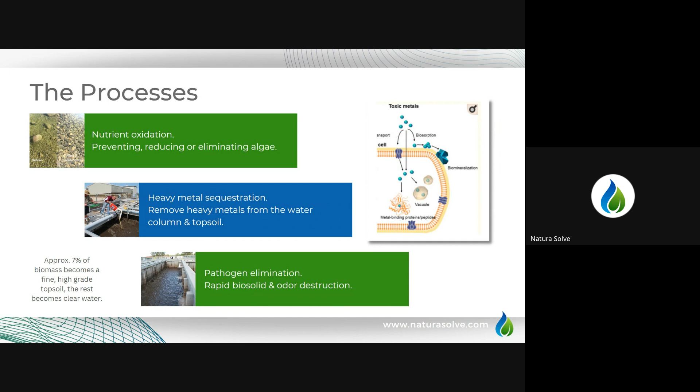We commercialized in 2018, right after the EPA flipped the rule on biologicals. And now that number of 24% has grown recently, but a lot of our customers use us as the primary aspect of their business or part of that service process. We've already gone over this. I'm not going to go into that anymore. Here's a few examples of some of the things that we do.

Ponds and soil. Pace Ranch is one of my favorites. I really like Walt Plum. He's a land developer in Utah. He's also in the oil and gas industry. And this was a trust land that he was doing as a give back to the community that you see on the left. And he laughed at me at first when I told him what I could do to this land and that algae that you see with a few gallons. I think we used 5 gallons total of product for that first year, and that included the waterways, the ponds, and a few different treatments.

But by 2 years later, the entire ecology had rebounded. He barely needs us anymore. He just does spot treatments now. And Park City has actually given him more water. So he's expanded his waterways and is really utilizing our product in the best modality, which would be in a circular manner. So for example, you can treat a waterway and then you can pump that water.

And we're setting up systems like that, utilizing Corden's easy flow system or Flo-Water systems, so that we can utilize the water that's already been treated, pump it back through his system, and let that leach back into the soil and also back into the waterway, and utilize the product in a way that both gives the bacteria and fungi a continual food source and makes everything much more efficient for the end user.

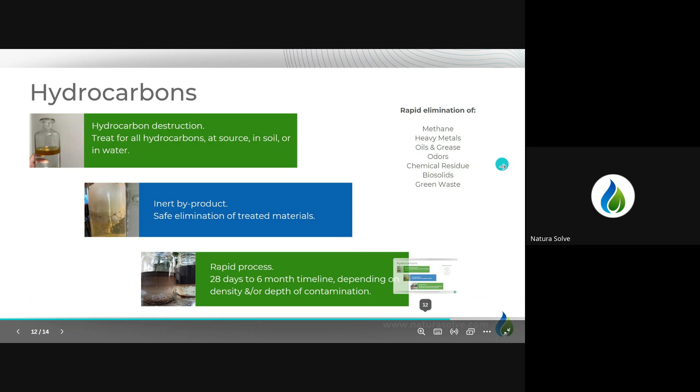Hydrocarbons is another area of interest. Carbon credits and VOC credits are an area where you can all learn to make extra money, I believe. And breaking the chain of hydrocarbons and VOCs is something that we can do very, very rapidly. We're working on a hydrocarbon-specific product, but right now we're 28 days to a 90+% reduction. We had a test on some grounds where we were not allowed to even touch the soil. We could only apply our product, and we had a 98% reduction in 3 months.

And so what we can do, if you see this little picture in the middle, is rapidly turn hydrocarbons inert. So we're working on some of those products. And a little bit about us. We have a rapidly growing team. We have been able to add a couple of wonderful individuals recently, and so they're not reflected.

Does it show my new screen, by the way, or is it still stuck on the old one?

It shows the new one. Okay, great. Opportunity to accelerate nature.

Yeah, and so that's a little about what we do at Natura Solve and a little bit about the products. But one of the things that I've found interesting about Cordon, about this group, and about what's happening in the marketplace is the more time I spend, the more I see that the whole market is lined up behind us. And so there's two things that I wanted to share with everybody here that I feel can help us all

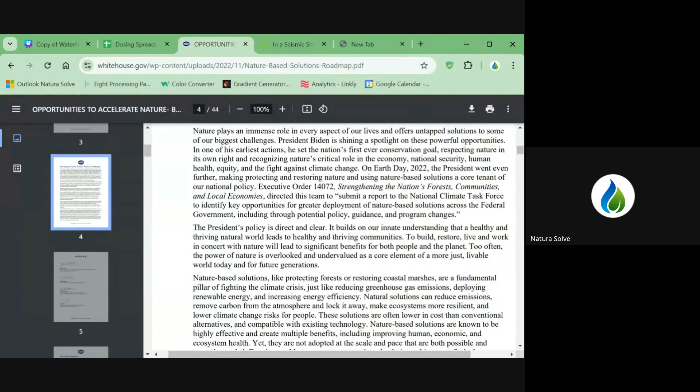There we go. Okay, so this is available online, but this is something I would encourage everybody to take a look at, because this reads like a playbook for what we're all trying to accomplish in introducing nature-based solutions. And those are some keywords that we're going to adopt in my group. But this is from November 2022, and the White House has decided that they think we can get up to a 30% increase in output and profitability by using nature-based solutions.

And so once this hit, it had a residual effect. And right here, this was very recently. It's being called a seismic shift. In the waters world, the Army Corps of Engineers plays heavily into a lot of different scenarios for lakes and waterways, as well as some other areas.

And so in following with that White House report, the Army Corps of Engineers has been mandated in what they're calling a seismic shift to use nature-based solutions prior to any other gray technology, any infrastructure, any equipment, any of those things. And so I would encourage everybody that is working in this area to look at these two arenas between the Army Corps and the White House.

That just is a mandate to use the types of products and the modalities that we're all utilizing, but these can help other decision makers move down the line, because nature-based solutions in the past have really not been what was focused on. There's been a lot of chemicals, there's been a lot of equipment, and now those things are being either outmoded or they're unavailable.

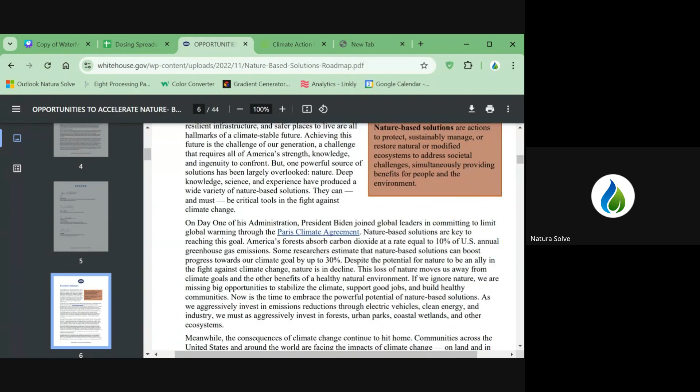And so regardless of why they're making these changes, there are huge, wonderful statements in here that can help everybody's business move forward. And I would just encourage you to absolutely take a look into those two things.

Will you send me both of those things, Jennifer?

Absolutely. Thank you. And so, like I said, most of the work that we do is in soil, water, and waste. However, combining our efforts with the other individuals that have different application methods for our technologies, or have projects where we can help to stimulate that initial ecological recovery, and then regenerative can come take over, for example, or we can have other modalities and technologies move in.

We just find that we're kind of a catalyst to help rapidly break down biosolids, help with heavy metal sequestration, eliminating those chemicals that are on the land, and giving the soil a good, healthy boost in the organic matter and moisture depth. Those things tend to help rebalance the ecology, help the bees come back. You can lick us off your finger. It's all organic and naturally occurring.

We've been, like I said, testing since 2014. So if anybody needs different data points, we've got that all over the place. And right now we're actually creating a wonderful database that will become like the farmer's almanac of biologicals and biochar. We're dialing in all the different types of uses and climates and application methods, as well as what types of biochar are beneficial for soil recovery, for different types of remediation.